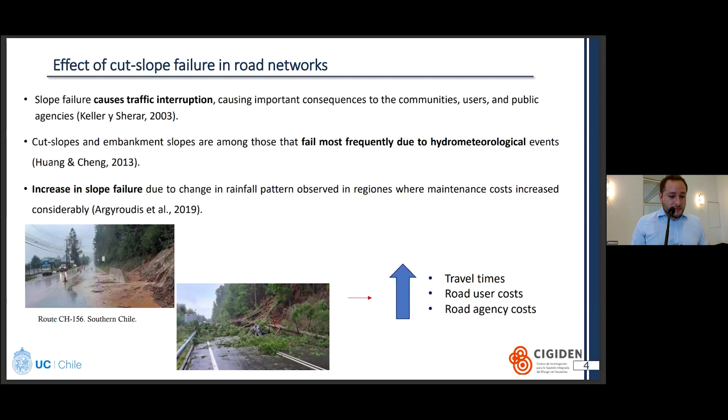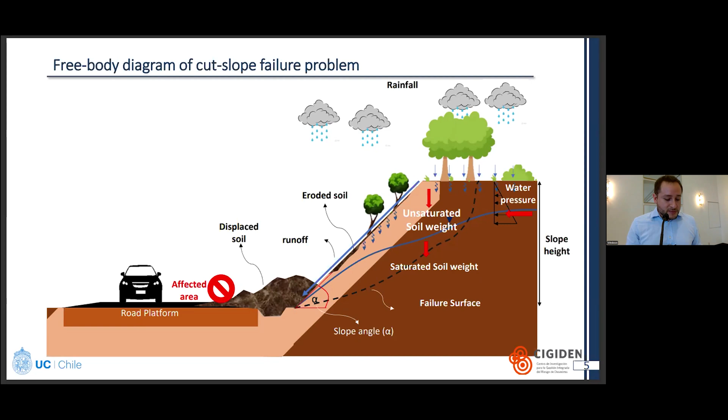Here you can see a free body diagram of the situation. On one hand, we have the instabilities in the slope, which can cause an imbalance in the resistance forces inside the slope that can cause the instability of the slope. Then, when the slope fails, a displaced volume blocks the road, causing the second situation of this project: the traffic is interrupted, causing traffic disruption, traffic variabilities and a real cutting of the traffic.

A first key point to understand is how we can estimate this slope stability. Common methods are the limit equilibrium methods, where the slope is simplified into different slices to obtain the failure due to the imbalance between the resistance forces and the driving forces. Another numerical method is the finite element method. It's a more complex method where the slope is divided into a mesh, and we can estimate the imbalance not in the forces but in the stresses and strains at the different nodes that compose this mesh.

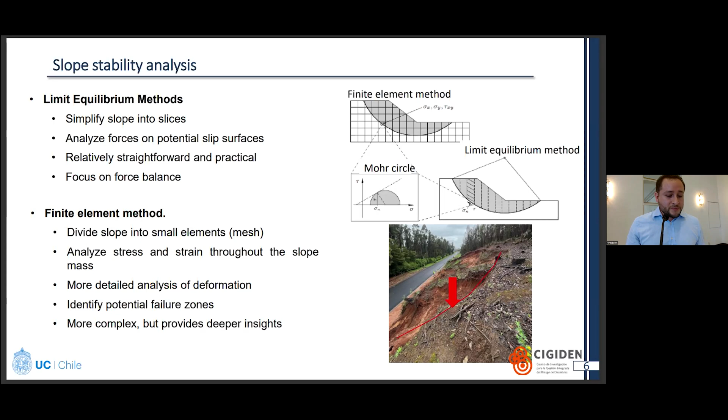Another key point is to understand what a fragility curve is. This research is part of another project, where the objective is to estimate the risk of traffic disruption caused by these cut slope failures. So, one way to represent the physical vulnerability of cut slope failure is the fragility curve. It's a probabilistic approach where we include the uncertainties from the hazard and from, in this case, the asset, the cut slope, to represent a probability of failure or a probability of a damage state as a function of, for example, rainfall duration or the total amount of rainfall, to represent the hazard intensity of this process.

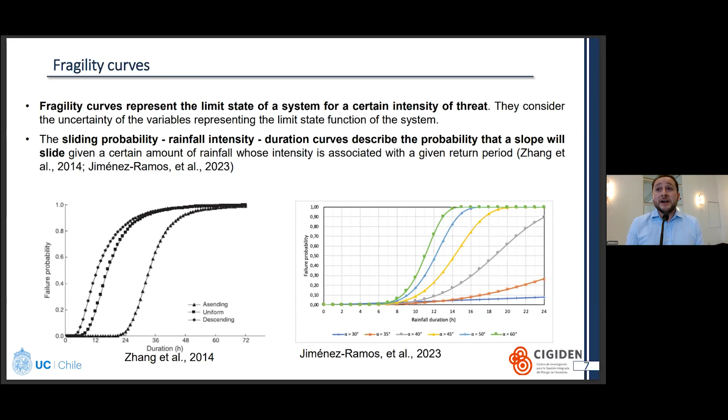Another key point is how we can characterize the hazard, in this case the rainfalls. We need to understand the hazard in the study area. In this case, we analyze the recorded precipitation data, then how we can randomize these events considering the variability of these rainfall patterns. So we use the KNN algorithm to randomize these events and obtain, for example, for the same return period, different rainfall patterns to identify these rainfall events.

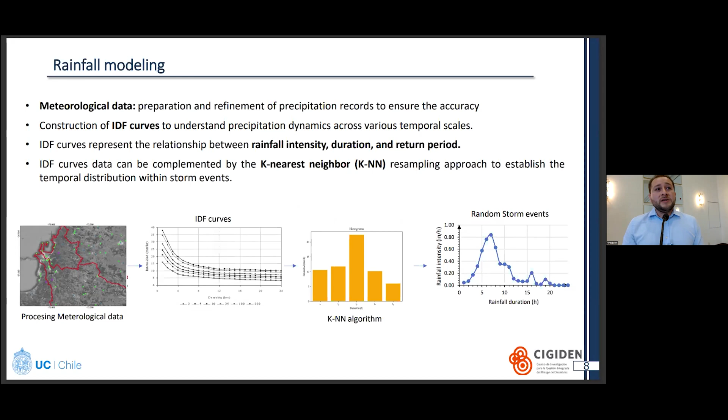This project, as I said previously, is part of a big project divided into two stages. The first stage, the subject of this presentation, is where we estimate the fragility curve to represent the physical vulnerability of the cut slope due to the rainfall hazard. And the second stage is where we estimate the risk of traffic disruption caused by the volume displaced by the failure of the cut slopes.

So the first stage is divided as follows. First, we model the rainfall, then we characterize the slope, for example its geometry and its soil type, and then we develop a slope stability analysis to estimate, in this case, the factor of safety of the slope, and then we estimate the probability curves, in this case, fragility curves.

For the first approach of this project, we use the Biobío region located in southern Chile. It's a region that has specific rainfall events with a total rainfall amount of 50 inches, and at the same time has varied topography. You have mountains, valleys.

In this study area, we found that in the past, for example in the past winter event, about 300 emergencies were reported for cut slope failures. We also carried out an inventory of the cut slopes on the main roads in this study area, and found about 1,000 slopes with different angle inclinations and different heights.

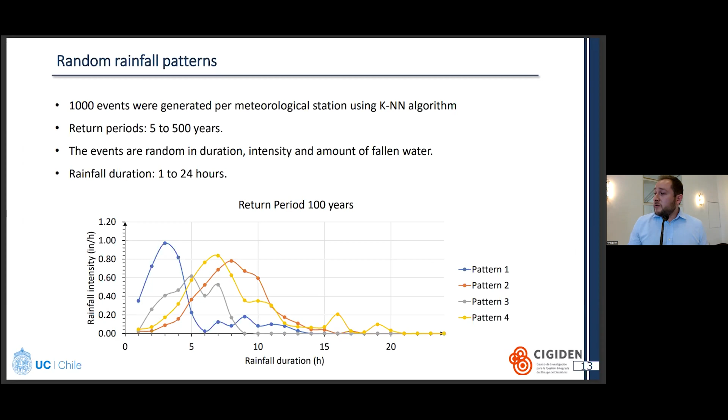From the recorded data of this study area, we generate about 1,000 rainfall scenarios for every weather station in the study area, where we have 16 weather stations, for different return periods from 5 to 500 years. As we can see in this graph, for the same return periods, we can identify different rainfall patterns, with variability in the rainfall intensity and at the same time in the rainfall duration. And integrating that, we can identify a different total amount of rainfall for the same return period.

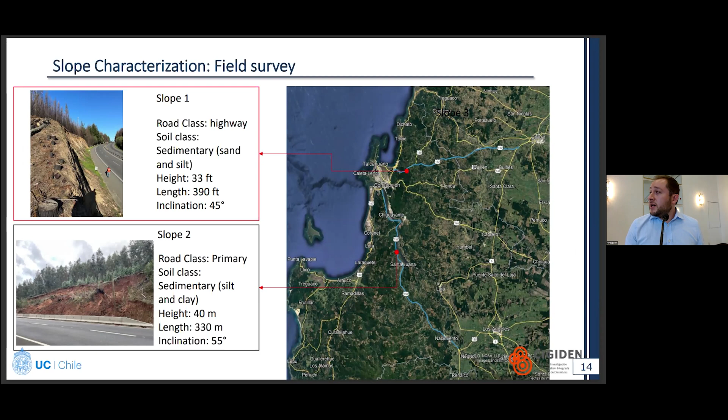For the slope characterization, first we identified two slopes with different angles of inclination, soil types, and different heights to develop the first approach of these curves and estimate the fragility curves. We carried out different field work and laboratory tests to estimate the properties of the soil and of the cut slopes in the study area. For example, we estimated the water level in the slope, the soil stiffness, the friction angle of the soil in the laboratory, the soil density, and different parameters that we use in the slope stability analysis.

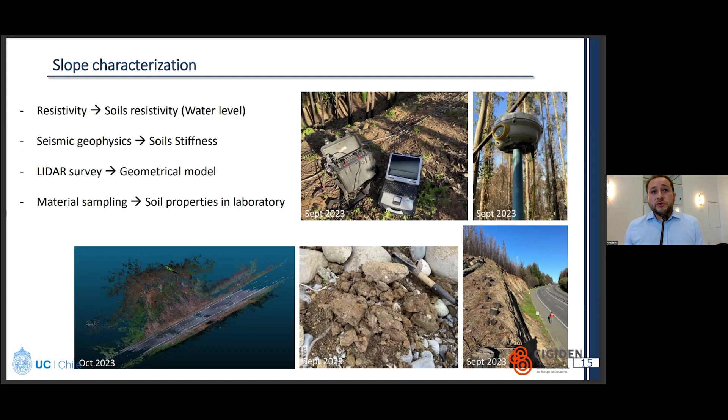When we do the stability analysis, we develop a model in the Plaxis 2D software to estimate the factor of safety, to represent how, due to a certain rainfall event, the water infiltrates into the slope and how it changes the properties, for example, the saturation or the pore pressures in the slope, to estimate that factor of safety. We define that the cut slope fails when the factor of safety is equal to 1.

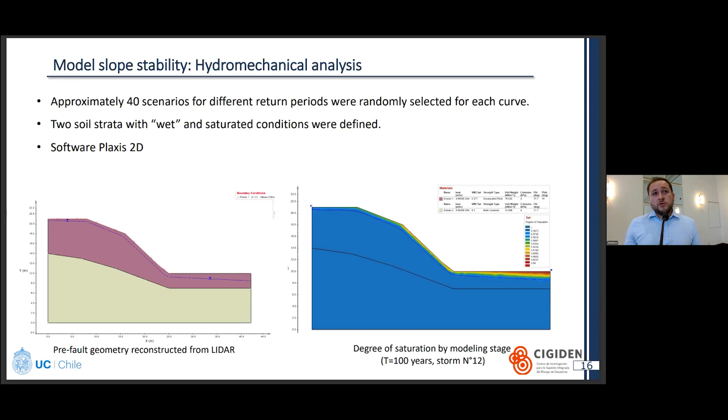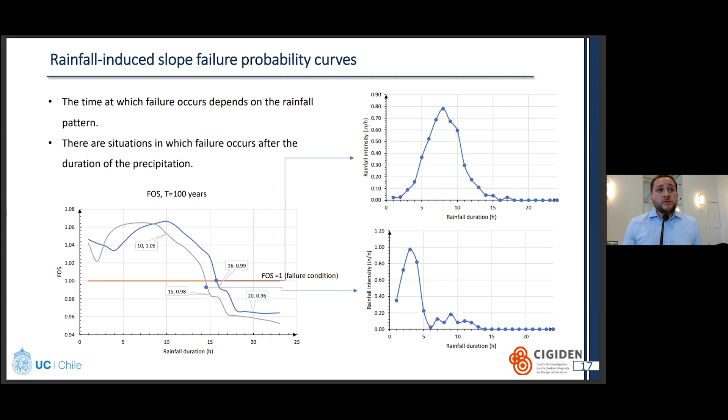In this graph, we can see how the variability in rainfall patterns changes, for example, the time when the failure occurred. For the same return period, we have different times of failure, with variability of, for example, 2 hours or 3 hours in some cases. That is important because this influence is taken into account when we develop the fragility curves.

Then finally, we estimate the fragility curve for slope 1 and slope 2 of this case study. In this case, the fragility curve represents the increase of the probability of failure due to rainfall intensity, represented by the total amount of rainfall. So when we have, for example, a return period of 500 years, it's more probable that the slope fails than for a 5-year return period. And at the same time, we have different probabilities for different geometries and types of slopes.

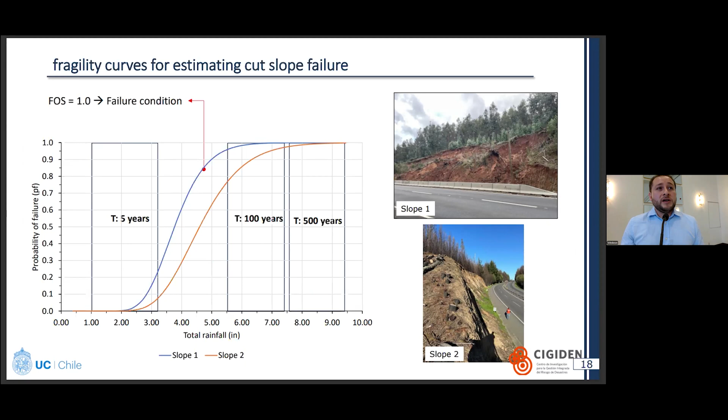Then, having that, we extended our model to all the cut slopes in the study area, collecting information about the soil properties, and we developed these parametric curves to represent the probability of failure with different types of soil, defined as sands, silts, and clays. In this case, I'm presenting them for the same height, that is 33 feet, but different inclination angles.

That is a practical application. The practical application of this is, for example, given information on the cut slopes in some study area, we can identify the hotspots which can be influenced by a certain rainfall event. We can identify the probability of failure for different cut slopes.

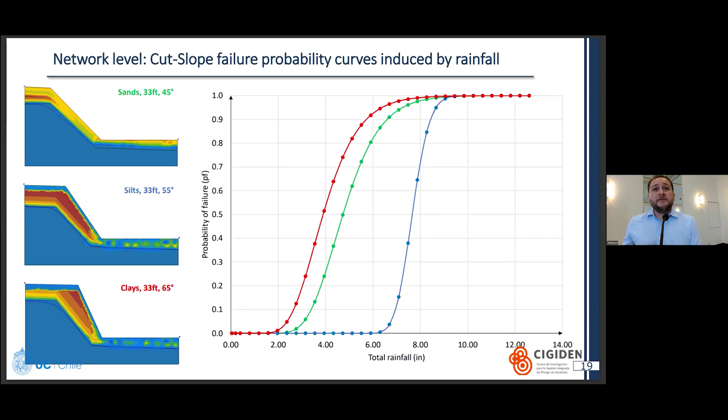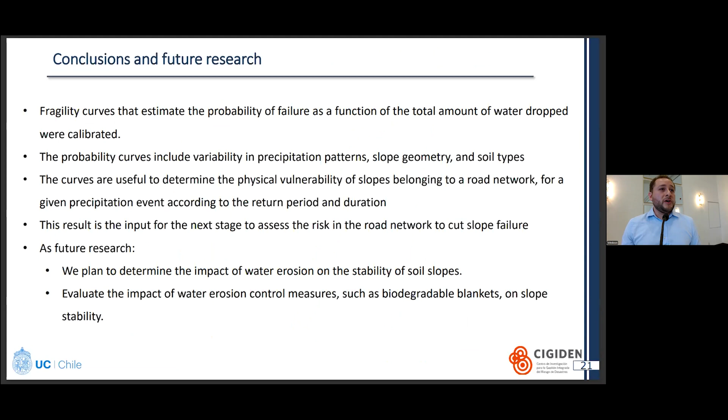So, as a conclusion of this research, we estimate fragility curves to represent the probability of failure due to a certain rainfall event. The practical application is to estimate, for example, for planners, where the hotspots of this hazard will be, and to define, for example, mitigation strategies to improve the performance of the cut slopes that fail for a certain rainfall event.